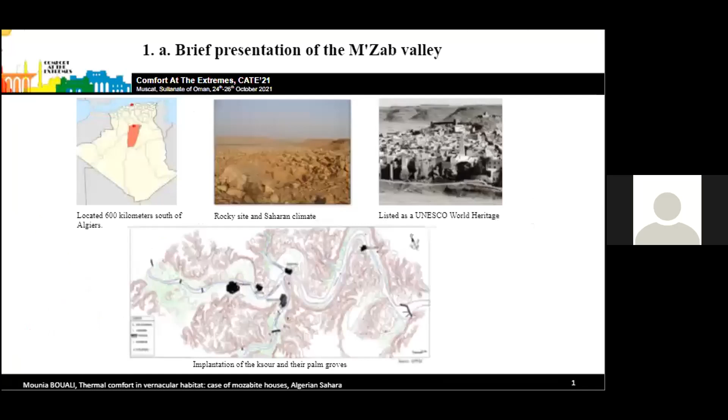As we can see, the Qsur and their palm groves are located along the Wadi Mzab, at two confluences. At the beginning of the 20th century, the oasis had nearly 2,000 inhabitants. Nowadays, it constitutes an oasis town of about 200,000 inhabitants, which gives it an urban character combined with oasis specificity.

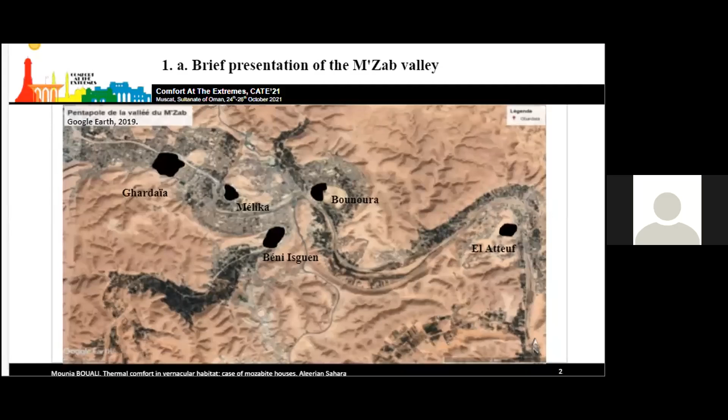Next slide, please. The oases have the same principle of implantation. The Qsar is always located on a rocky eminence to stay safe from floods. Then below, the palm grove grows on the bed of the Wadi, where it is easier to dig wells and develop agriculture. The vernacular house typologies that will be presented in this talk no longer exist in their integrity today.

It is for this reason that we mainly rely on restitution works, particularly abundant in the first half of the 20th century. In addition, we use information and descriptions collected through interviews and narratives of people who remember this former Mzab, which still remains very present in their speech.

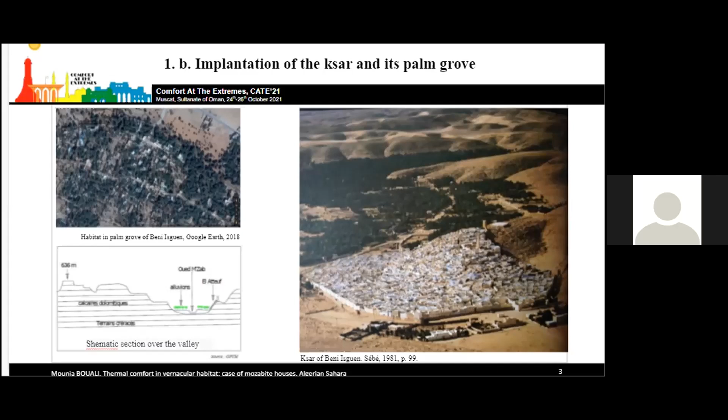Next slide, please. The Taddart are mainly built in stone and timshamt. Timshamt is a local mortar used for binding and as plaster. The roofs are made of a structure of palm trunks filled with earth, then covered with timshamt, this local plaster.

The house spaces are organized in 3 levels and connected by 2 staircases. The ground floor is composed of different spaces organized around a central room, called the patio, or وسط الدار, the center of the house. This central room on the ground floor has an extremely important role in temperature regulation.

In fact, with the front door, it creates a dynamic airflow which contributes to the ventilation of the ground floor. The central room is also the source of natural lighting on the ground floor through its zenithal opening, called shebek. Around this patio, the central spaces are organized: the women's lounge, reception area for men, the bedrooms, kitchen, and a dry toilet.

So it's the central space which all these spaces are organized around. The upper floor is semi-covered and partially built, and composed of the same spaces: bedroom, small storage room, dry toilet, shower area, and kitchen area too. These spaces are organized about the shebek, the zenithal opening of the ground floor, superposed on the spaces below.

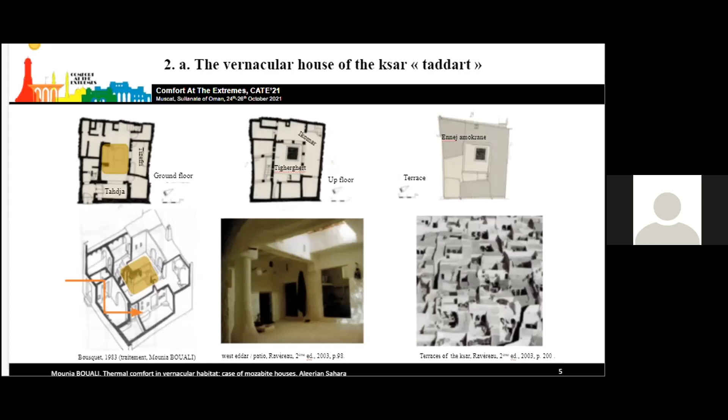The Mozabit dwelling, whether located in the Ksar or in the palm grove, is characterized by a way of living based on daily migration or movement between different floors, very interesting to observe. This temporal adaptation to climate through inhabiting is common in many hot countries, but particularly characteristic in the Mozabit oasis compared to other Algerian Saharan oases, which are composed of two entities. The classical definition is that an oasis consists of the ksar for houses and the palm grove for agriculture, but without dwellings.

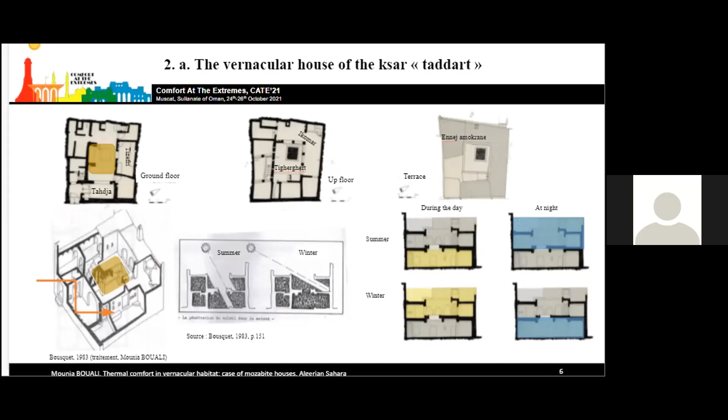The duplication of certain spaces from the ground floor to the first floor, like kitchen, toilet, and other rooms, does not mean there are two separate apartments occupied permanently and independently from one another. These are all spaces in the home used at specific times of the day, depending on the alternation between day and night and according to the seasons. Some are versatile, and their uses change according to the movement of the sun's rays.

During the winter, the sun is low above the horizon. During the day, the sun is low and the ground floor is dimly lit and cold. The stone walls allow the heat stored during the day to escape during the night. In contrast, the floor of the southeast-facing upstairs portico is in full sun and at the same time warms the ceilings of the rooms below. These orientations also make it possible to be sheltered from the prevailing northwesterly winter winds.

It is therefore on this floor that daytime activities take place. During this season, the loom is installed upstairs in the ikomar, the portico situated on the upper floor, as we can see in this picture. At night, the openings of the patio, the shebek, and the doors are covered with rugs to increase the thermal insulation of the room, and activities move to the ground floor, which has stored heat in the thickness of its walls during the day.

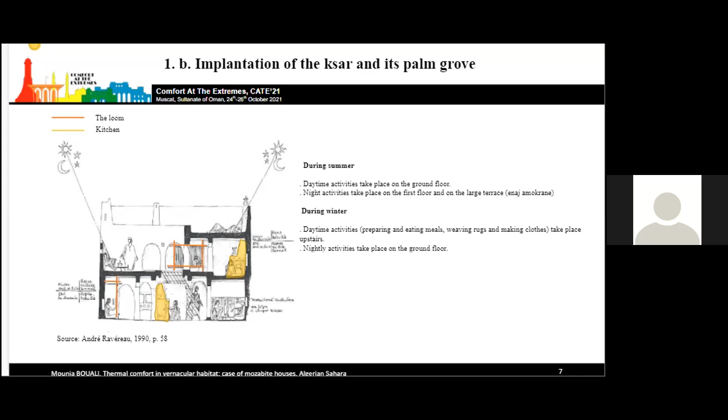In the tahdja, an intermediate space between the entrance door and the patio, during this season the loom is installed in the tahdja or in the tisafrit, the women's lounge, or in the patio, to take advantage of the light and freshness predominant in these spaces. The women's lounge, tisafrit, is below the ikomar portico, and since the sun is high in summer, the ikomar is in shade and protects the ceiling of the tisafrit in the middle of the day when the sun is at its peak.

The patio opening is covered with mats and moistened palm to keep the air fresh in homes with a cellar. The cellar is very popular for naps, since there is an important temperature difference of about 10 degrees. During the summer evening and at night, all activities take place on the floor between the portico and the terrace, the ground floor becoming uncomfortable due to the accumulation of heat absorbed through the day. The large terrace, which overlooks the covered part of the first floor, is mainly used for summer sleep.

Next, I will present the second type of Mozabit dwelling, which is the akham. Akham is the term used to designate this second habitat. It's established in the loosely built fabric of the oasis with a garden, and is occupied mainly in summer. This duplication of the habitat is also the result of seasonal migration to the palm grove, where people would stay for several months to carry out agricultural work, mainly related to the date palm. At the same time, it reflected the desire to settle in the palm grove to escape the heat of the Qasr, which lacks vegetation and has scarce water resources.

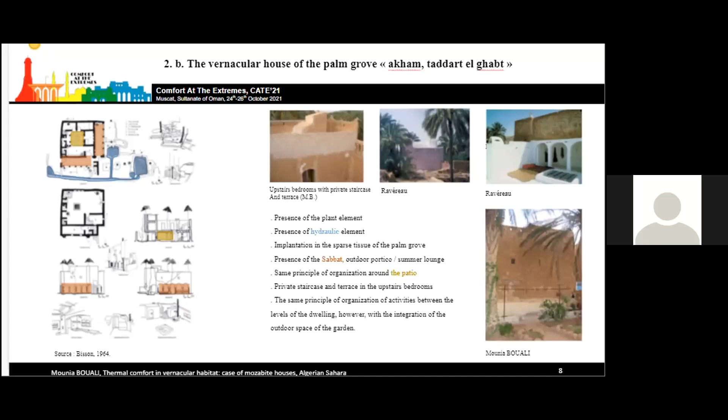In the Akham, the same construction materials are used, but more sun-dried earth bricks. As for the organization, we find in the Akham the same principle of vertical daily nomadism as in the Taddart.

However, the garden added an additional dimension to this move, because if in the Qasr terrace is only a space allowing to be outside, the garden of the palm grove is the preferred place during the vacation. It helped create a microclimate and humidify the air.

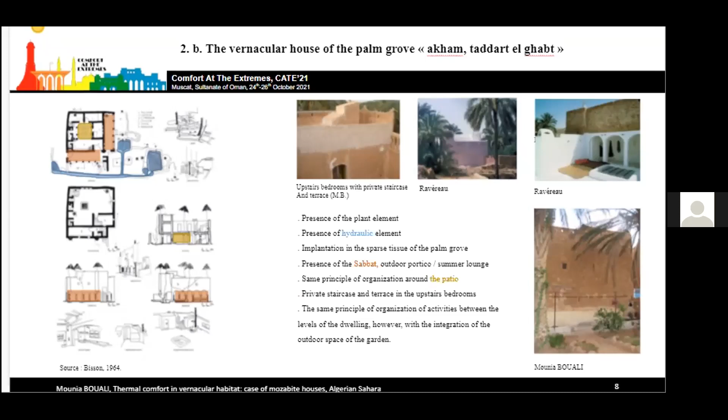So for my conclusion, I just need to say that it's very important not to imitate tradition, but to learn from tradition. The objective of my talk is to show how the question of thermal comfort can also be taken care of by inhabitant practice and simple elements.

Public and heritage policies must take into account local and specific modes of accommodation, for example the creation of parks and public gardens in line with urban development. Today the oasis town is expanding, but without thinking about extension of palm groves or parks. In the Saharan towns, outdoor space is part of residential culture that architects and urban planners must take into account. Thank you for your attention.

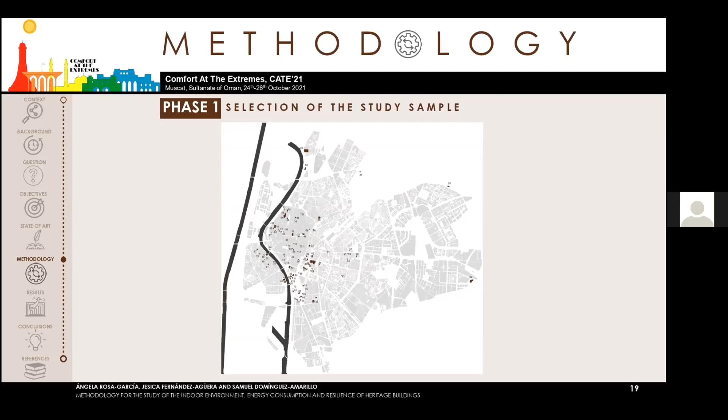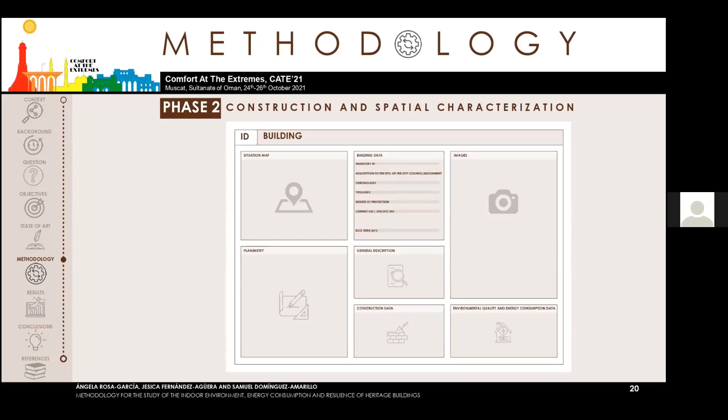In phase 2, the constructive and spatial characterization of each of the buildings in study sample A will be carried out, which will allow a first classification. A series of files will be generated like the one shown, which include information on each location, year of construction, use, construction data, surface, etc.

Phase 3, characterization of environmental conditions and energy consumption, is developed on study sample B. It will consist of in situ measurements of the interior environmental conditions and energy consumption. Indoor environmental monitoring will be continuous for a period of 15 days in winter, summer, and intermediate season. Measurements will be recorded every 10 minutes, creating a database with the current status. The external environmental conditions will be obtained by means of an external station that will be contrasted with the data of the National Meteorological Agency of Spain.

Phase 4 will consist of simulation of the evolution of climate change. It will also be carried out in study sample B. The evolution of thermal conditions inside buildings will be studied with the DesignBuilder program in the current state and other conditions of future climate change. Phase 5, generation of a database, will result from the compilation of data from the previous phases, generating an open database that can be consulted by the agents in charge of carrying out the rehabilitation or adaptation work of these buildings through the GIS tool.

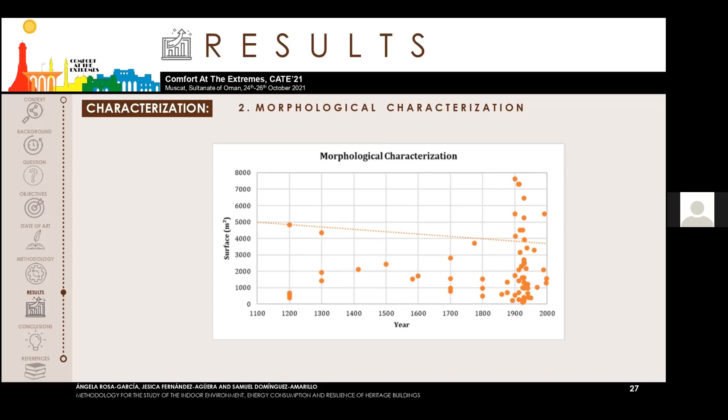As conclusions, this work includes a first approach to the application of the proposed methodology, which includes some of the fundamental characteristics of the buildings that make up this period, aiming at the complete cataloging, both spatial and constructive, of the building stock. With the characterization process carried out on the set of heritage buildings studied, several aspects can be concluded. First of all, in terms of the construction of buildings, the trend of slow and intermittent production has been verified until the 20th century. However, the 18th and 19th centuries stood out, experiencing a growing increase in both periods. Starting in the 20th century, more than half of the sample was built, specifically 62%, progressively accelerating the rate of production in this period.

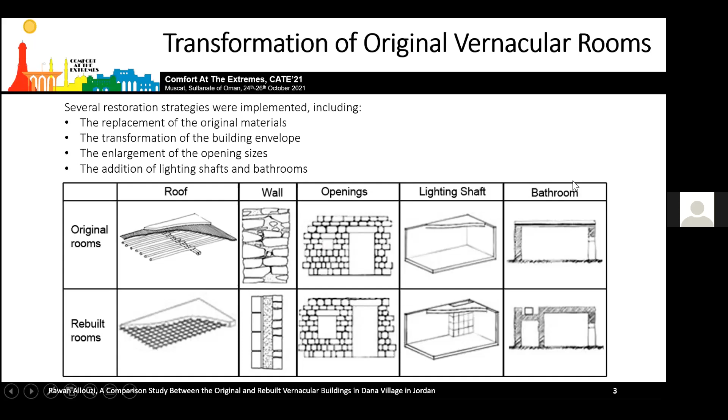Combined with the enlargement of opening sizes and the addition of lighting shafts and bathrooms, the implementation of these changes affects the indoor thermal conditions that depend mainly on several factors, including the construction materials, opening sizes, thermal mass, and orientation. Here we can see a few examples comparing the original form of the vernacular dwelling, which was composed of a single space. And after the rehabilitation project, we can observe that it's multi-spaces after the addition of bathrooms and lighting shafts.

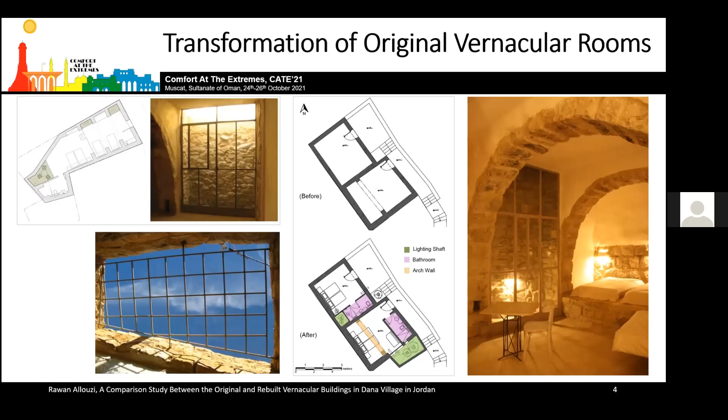Therefore, this paper seeks to assess the effectiveness of the restoration strategies by analyzing the thermal performance of both the original and rebuilt vernacular buildings. In other words, it aims to identify which type is more effective in providing thermal comfort in summer and winter, while highlighting the effect of the restoration on the thermal performance. For this purpose, Dana Hotel was considered as a representative case study because it contains both original and rebuilt rooms within its building. The thermal performance of the original and rebuilt rooms was assessed theoretically and practically.

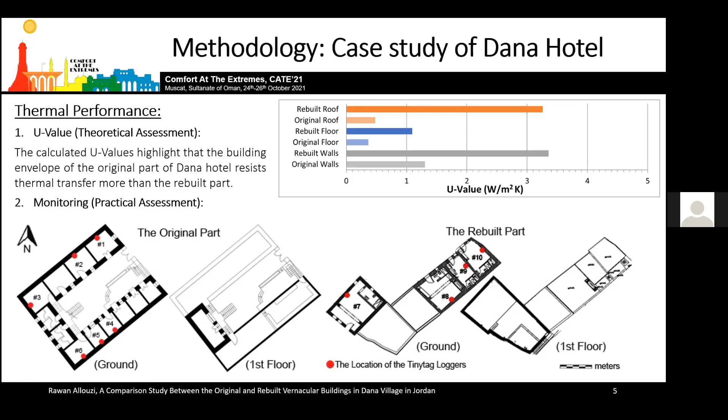On the other hand, to practically assess the thermal performance of the hotel, 10 hotel rooms were monitored for a period of 2 months, August 2019 and January 2020, including 6 original rooms and 4 rebuilt ones. The original part of the hotel is formed of 12 rooms surrounding the central courtyard from 3 sides. Meanwhile, the rebuilt part is formed of 6 en-suite hotel rooms composed of bedroom, bathroom, lighting shaft, and kitchenette. Tinytag loggers were used to record air temperature every 15 minutes, placed at 1.5 meters above the floor level.

The collected data was analyzed and compared between the original and rebuilt rooms, demonstrating the variation of the indoor temperatures throughout the day and providing thermal comfort as the criteria of assessment of this study. These criteria of assessment are first analyzed within the original and rebuilt part of Dana Hotel separately. The statistical method is used to analyze the monitored physical variables to assess the thermal performance, illustrating the fluctuation of the recorded data, which is the air temperature throughout the day, from day to day, and from room to room. And providing thermal comfort is investigated through the Adaptive Thermal Comfort Standard, BS EN 15251. Then a comparison study is conducted between the final results of both parts, using it as an evaluation method to assess the transformation of Dana's original vernacular building within the thermal context.

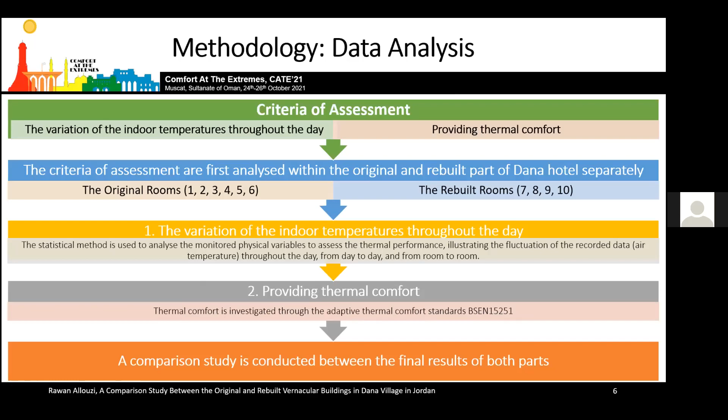Starting with the results, it was observed in the original rooms that the indoor temperature followed the outdoor temperature profile, but with a significant time lag, being always lower in summer. The maximum temperature is always less than the outdoor temperature around noon due to the thermal mass in all spaces except in the kitchen, which is space 6, due to the high internal heat gains from cooking.

This is because the thermal inertia of the thick stone walls and clay roof offers small fluctuations in the indoor temperature. The high thermal inertia of the original materials increases their capacity to store heat and then emit it outdoor when the temperature is lower. However, lower indoor temperatures are noticed in room 4 and 5 because their roof is not exposed to the outdoor conditions, having an additional floor above them, as we can see over here. Meanwhile, the roof of room 1 and 3 is exposed to the outdoor conditions and solar radiation, leading to absorb heat and transfer it to indoor spaces.

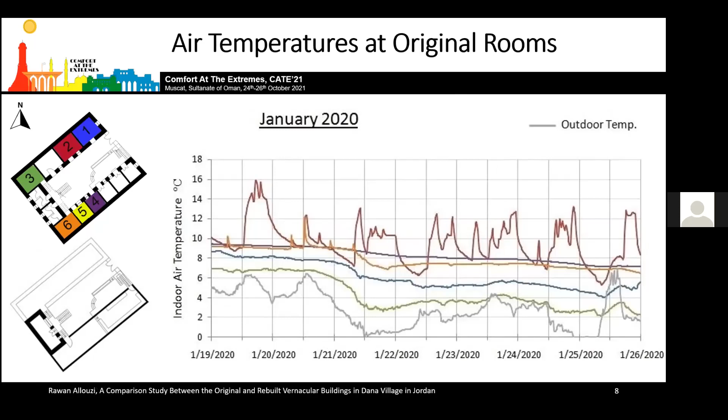A different pattern of variation is noticed in winter. The indoor temperature follows the profile of the outdoor temperature in room 3, being the coldest room among the other original rooms. This is because the sun does not enter this room due to the absence of windows. Moreover, it was not occupied during the winter monitoring period, showing less variation in temperature. Similarly, rooms 6 and 4 were also unoccupied but showed higher temperatures due to reduced heat losses from their roof, which is not exposed to the cold outdoor conditions.

On the other hand, the daily variation is more noticeable in room 2, with a diurnal swing ranging between 3 to 8 degrees Celsius. The indoor temperature is most of the time higher than the outdoor temperature, and the difference between them sometimes approaches 12 degrees Celsius when the outdoor temperature is very cold. The indoor temperature reaches its maximum in the afternoon and minimum at midnight. This is because when the outdoor temperature reaches its maximum near noon, the concrete roof of room 2 transfers the absorbed heat to the indoor spaces after a short time due to its lower thermal capacity.

As expected, the variation of indoor temperature is influenced by the building envelope and opening sizes and orientation, as well as construction materials. The few and small size of windows protect the indoor spaces from direct solar beams during summer days and offer good ventilation and cooling during summer nights. Meanwhile, these windows allow the sun rays to indoor spaces during winter days due to their lower elevation angle.

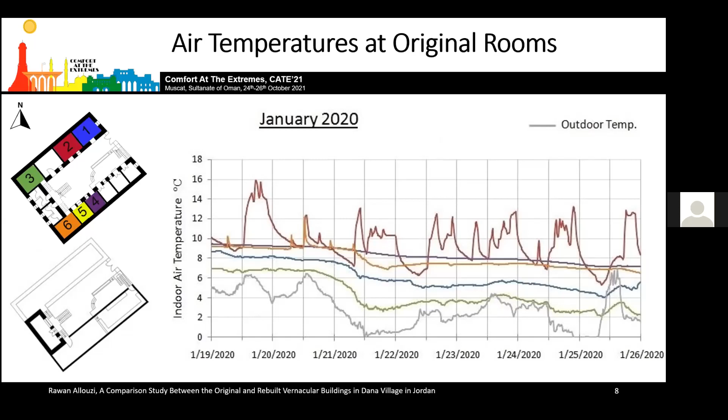Moving to the results of monitoring the rebuilt rooms, the trend of the indoor and outdoor temperature is different than the original rooms, as the changes of the indoor temperature do not follow the changes of the outdoor temperature in summer. The indoor temperature is higher than the outdoor temperature at night and lower during the day. The fluctuation of the indoor temperature is small and the temperature is consistent. Indeed, the daily variation is hardly noticeable in all spaces despite different occupancy hours. They reach the maximum temperature in the afternoon and the minimum in the morning.

The enlargement of windows and the addition of lighting shafts helped in providing cooler conditions. In terms of enlarging the external windows, these windows enhance air movement due to their bigger size. This strategy is efficient as they are northern windows, which do not bring in solar gains. Moreover, the addition of lighting shafts is providing internal windows that enhance the air movement and ventilation for cooling.

It's observed that room 8 has slightly colder conditions compared with room 9 and room 10, although they have the same building envelope, opening size, and orientation. This is because room 8 is bigger in size, increasing the heat transfer area in the room. Moreover, room 7 and room 8 have approximately the same area, but room 7 is slightly warmer due to having southwestern windows that bring in solar gains, warming up the indoor spaces in the afternoon.

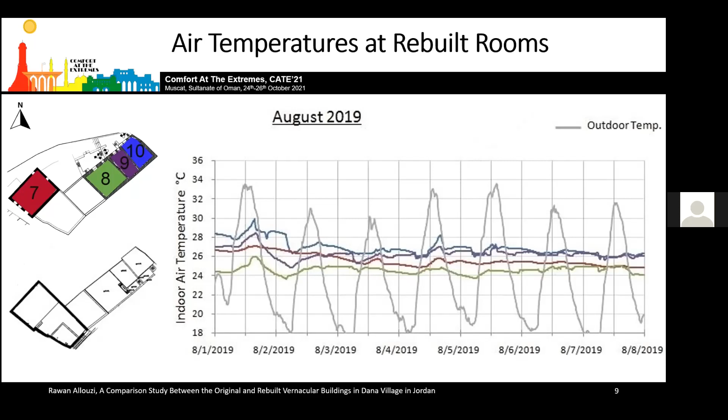A different pattern is noticed in winter with a wider fluctuation, less affected by changes in the outdoor temperature. The indoor temperature is higher than the outdoor temperature most of the time. The daily variation is noticeable sometimes in some spaces more than others.

For instance, the diurnal swing varies from 0 to 8 degrees Celsius, showing small values at room 7 due to non-occupancy status, as we can see here. Meanwhile, the diurnal swing values at rooms 8, 9, and 10 are bigger and more variable according to their occupancy time.

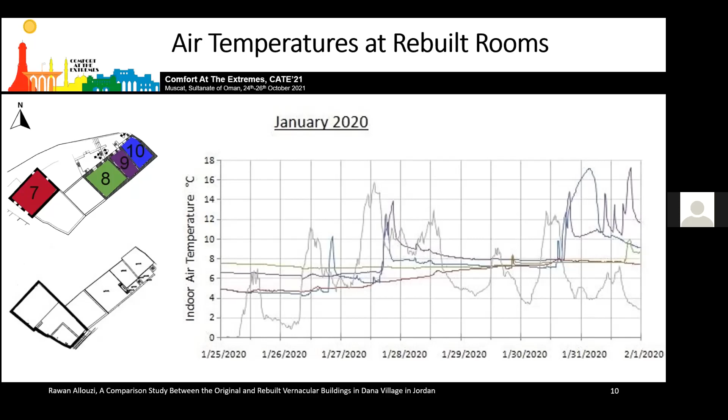In winter, the indoor temperatures are either similar in both types of rooms or slightly warmer in the rebuilt rooms. The original spaces show different performances as some rooms, such as 4 and 6, show less variation in the indoor temperature compared with the other original spaces, as they were unoccupied at that time. Meanwhile, the other original and rebuilt spaces provide similar variation in the indoor temperature.

You have 1 minute left.

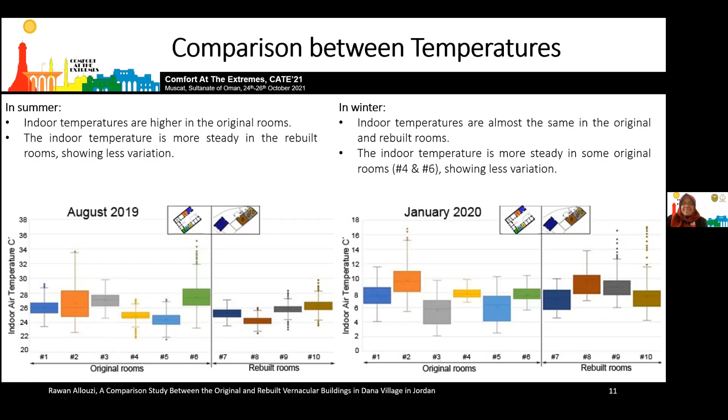Bigger and more windows were used in the rebuilt rooms, enhancing the air movement while preventing solar gains. The orientation of these openings reduced the impact of their size because the direct solar gain is the main contribution affecting the indoor temperature. Therefore, the inward and northern orientation of the windows and lighting shafts of the rebuilt rooms reduced the impact of being more exposed in summer. Moreover, passive cooling strategies such as plants and trees in front of the rebuilt rooms enhance night cool breezes.

The adopted changes in the rebuilt rooms work together to adapt to the weather as a whole system, including the replacement of the building envelope, the addition of lighting shafts, and the enlargement of windows. Replacing the building envelope without increasing the opening sizes would disable the whole system, as observed in room 2. The replacement of the original roof while keeping the original opening sizes failed to adapt to the outdoor conditions, providing more variation in indoor temperature.

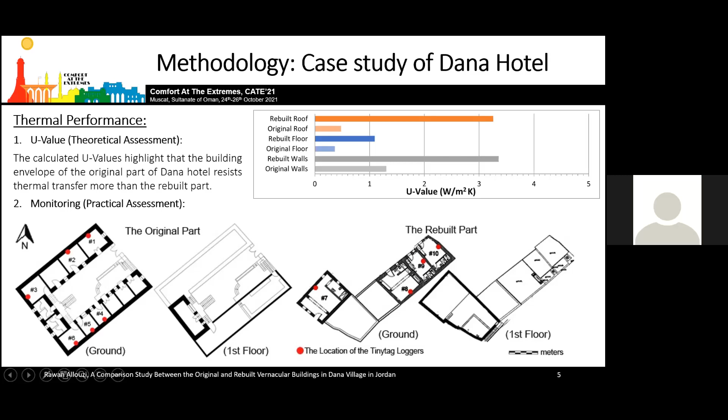In summary, let me show one sentence to summarize. Yes, for each slide, just one sentence.

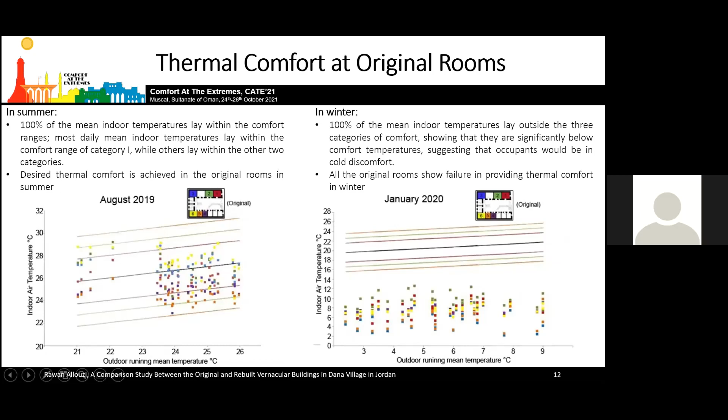We can see here, discussing the thermal comfort in both types of buildings, that desired thermal comfort is achieved in the original rooms in summer, as they lie within the comfort ranges, while all the original rooms show failure in providing thermal comfort in winter. For the rebuilt rooms...

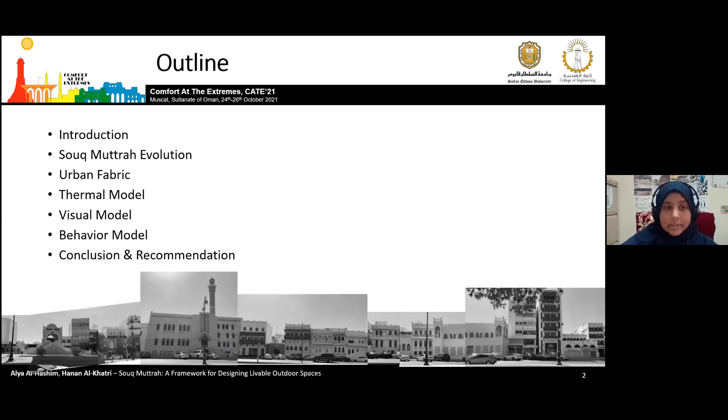To start with, streets have been used as a space for engagement in commercial and social recreational activities throughout the years. Livability of street and open spaces is a major consideration for designing sustainable cities. Livable outdoor spaces encourage dwellers to spend more time outdoors, which is important because of its positive impact on health and well-being. A healthy community encourages its dwellers to spend more time outdoors.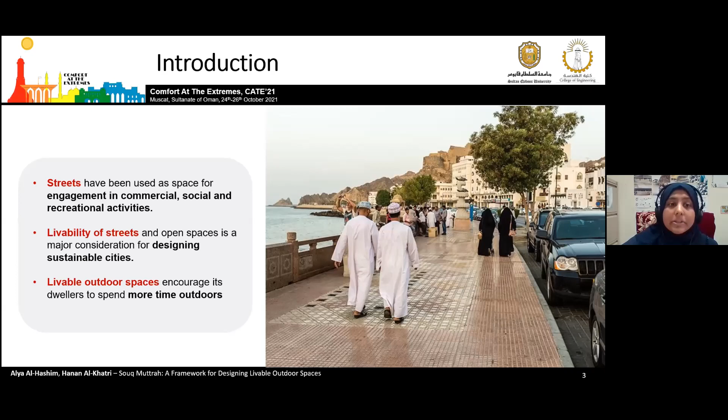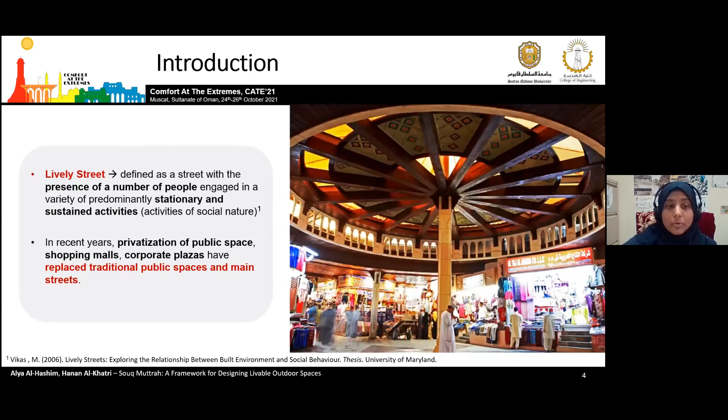A lively street is defined as a street with the presence of numerous people engaged in a variety of predominantly stationary and sustained activities. These activities are most of the times of social nature. In recent years, privatization of public spaces - shopping malls, corporate plazas - have replaced traditional public spaces and the main street. Having the malls has attracted most of the visitors, and this has reduced the traffic that we saw over the years in public streets.

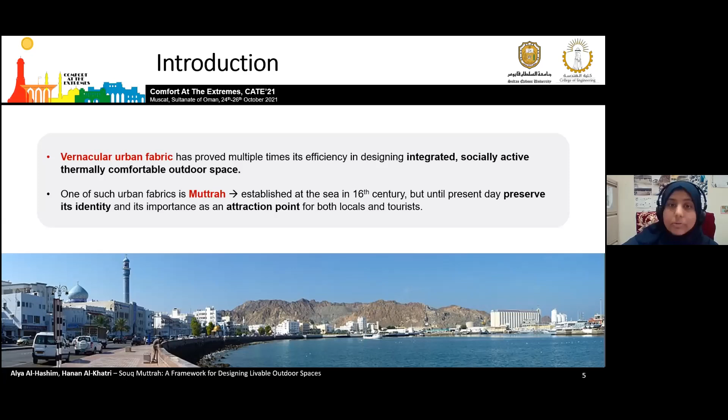Vernacular urban fabric has proven multiple times its efficiency in designing integrated, socially active, thermally comfortable outdoor space. One such urban fabric is Muttrah. It was established at the sea in the 16th century, but until present day preserves its identity and importance as an attraction point for both locals and tourists. Even now, with all the malls and modern spaces, people still choose to go to Muttrah Street, and tourists also consider it one of the most important destinations when they visit Muscat.

The aim and focus of this research is to determine the relationship between the micro-scale physical characteristics and uses, and people's pattern of social activity in commercial streets - linking human behavior with the physical properties of the street. The underlying objective of this study is to investigate the correlation pattern between spatial behavior and physical characteristics of the urban space.

The methodology followed in the research is that the open space was analyzed in terms of physical geometry, connectivity, thermal and visual performance. Different models were created for showing the different layers or performance of different aspects. These properties were then overlaid over the spatial use and behavior. Multiple Rhino Grasshopper scripts were used to extract urban geometry, connectivity properties, and thermal and visual performance of the urban fabric.

This is just a demonstration of how different types and different layers of an urban property were considered and linked to the human behavior.

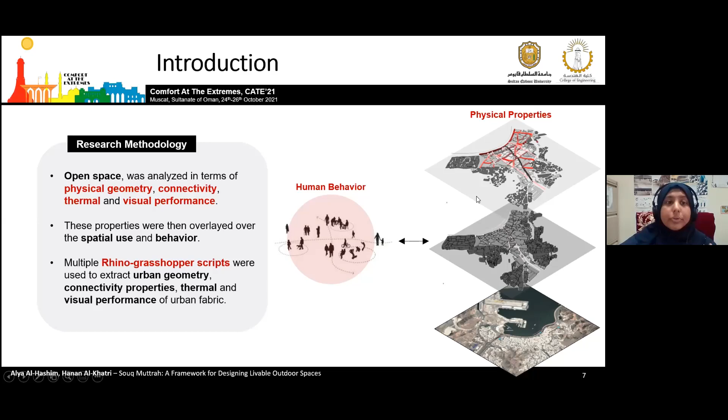Before discovery of oil in the 1970s, Muttrah was the center of Omani commerce. It is still considered the largest seaport in the region, consisting of a traditional marketplace called Souq Muttrah and housing communities. Strategically located adjacent to the Harbor Muscat, it witnessed thriving trade in the age of sail. Souq Muttrah gave way to a cosmopolitan society to function and trade, who maintained their culture, habits, and language through engagement with the local traders.

This was the reason why Muttrah Souq thrived in the beginning and is still thriving. The souk still maintains a unique sense of place and a position worth studying. This sense of space that Souq Muttrah is providing is one of the key reasons why it still maintains its identity and its livelihood.

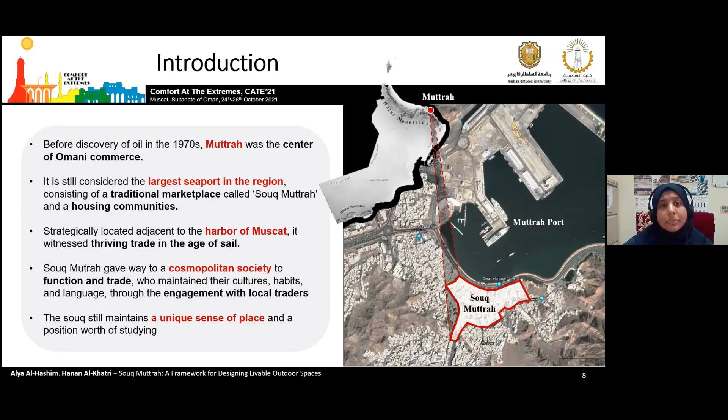Souq Muttrah's current general state is similar to the way it appeared during the 1970s. So if we compare from 1970 up until now, in terms of the fabric itself, it has maintained its integrity or the same shape.

The most apparent difference in the souk over time is the changes in land use. As the years passed, the land use kept changing, the type of shops kept changing, based on the variety of products received from the harbor and what consumers started preferring more and more. So the land use and the products sold kept changing and adapting over the years.

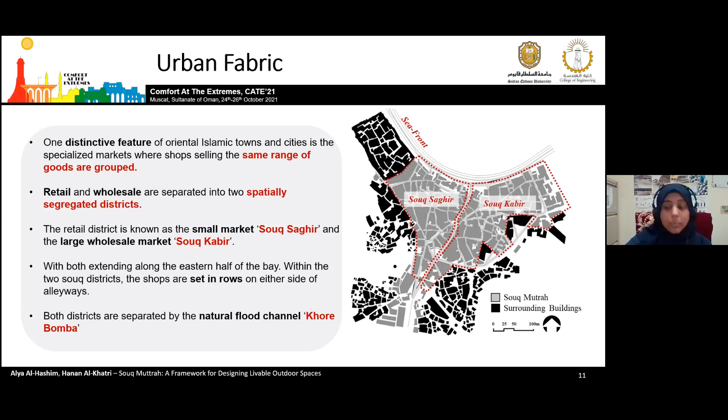The total pedestrian network is around 6,270 meters in the entire Souq Muttrah. Since the souk has been one of the main touristic destinations of Muscat, this explains the large number of souvenir and antique shops focused along the main spine.

However, as the pathways continue further away, the products of the retail units tend towards more regular day-to-day shopping for the residents of the neighborhood areas.

In this map, you can see that there are different pedestrian walkways. They change in terms of width, which we will talk about later, and also in height. You will also find that multiple pedestrians connect with each other in areas known as nodes.

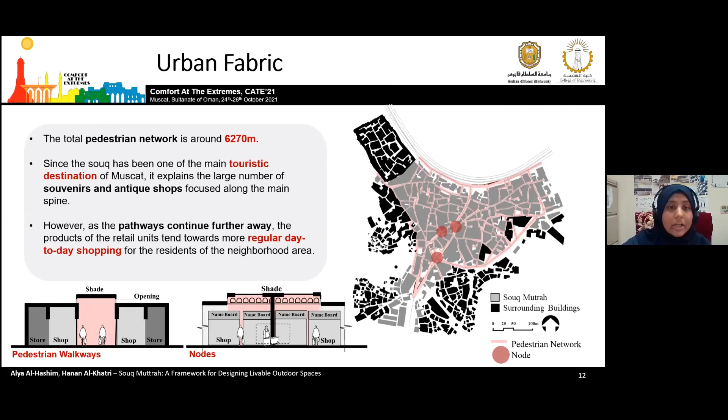These nodes are where multiple pedestrians get together and create a bigger node. Now, coming to the thermal model, urban canyon is a simplified rectangular profile of infinite length. It has been adopted as the basic structural unit for describing a typical urban open space, based on the width, height, orientation angle, and the shade of the rectangular profile of the urban canyon.

The pedestrian network in Souq Muttrah can be categorized into 9 types, 8 of which are the pedestrian pathways we talked about, and the 9th is the node.

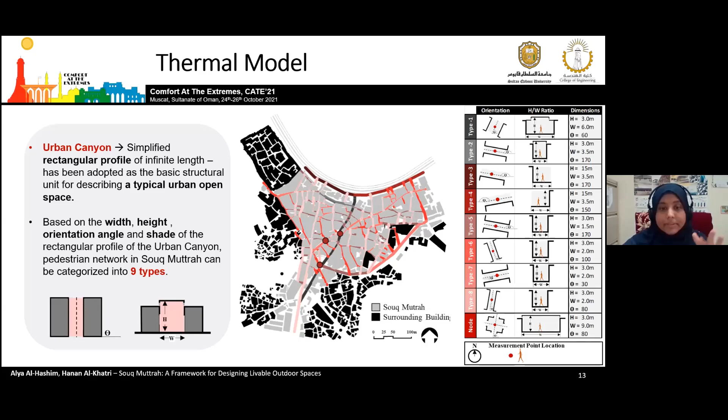On the right-hand side, you can see all the typologies, their orientation, and height-over-width ratio of the urban canyon, the dimensions, and you can see on the map how these types are projected onto the pedestrian connection map of Souq Muttrah, and how the different types manifest within the urban network.

Continuing on the thermal model, an urban microclimate model is fundamental to the evaluation of outdoor thermal comfort. The analysis geometry used for the thermal model was the urban canyon discussed earlier, and the unit of measurement chosen was the mean radiant temperature, which is a key variable for evaluating outdoor thermal sensation, used instead of just the outdoor temperature. The tool used to conduct the thermal model was Rhino Grasshopper with the Ladybug plugin.

On the right-hand side, you can still see the different typologies we segregated the urban canyon into. Next to it, you can see the mean radiant temperature fluctuation throughout the year, over 24 hours of the day. The dark grayed areas are the times when the souk is not functioning. Just to bring to your attention, the souk's functioning times are from 10 a.m. up until 1 p.m., then it closes and opens again at 4 p.m., continuing up until 10 p.m.

Compared to the outdoor mean radiant temperature, the pedestrian network in Souq Muttrah provides a thermally comfortable environment, especially in two spaces: the node and the type 2 urban canyon, where we see a significant decrease in mean radiant temperature. Compared to the outdoor measurement point, the difference, or delta, in mean radiant temperature is around 35 degrees Celsius in summertime. The difference is not as much in wintertime, but the thermally comfortable environment the pedestrian network provides can be seen during summer and the equinox months.

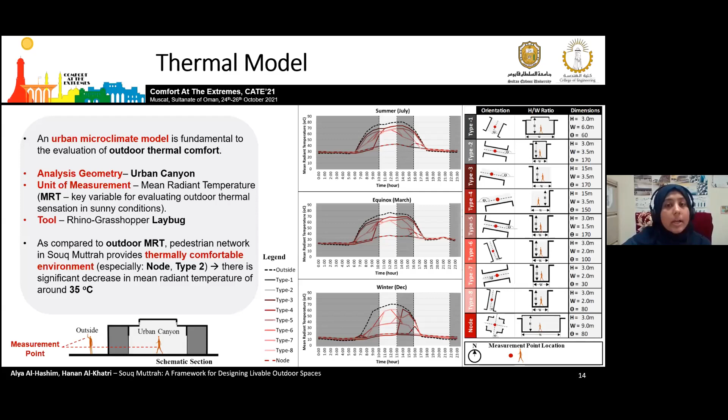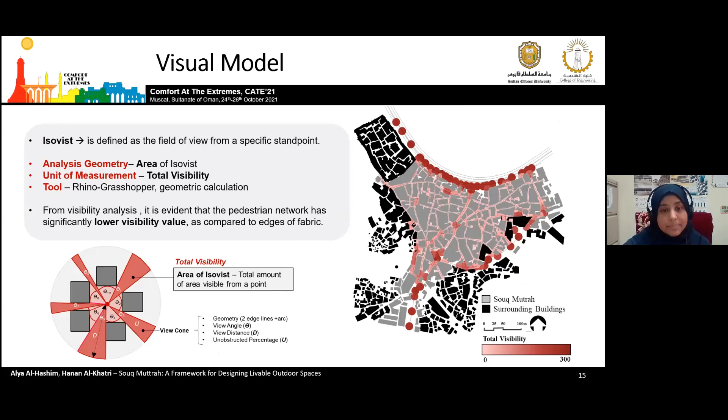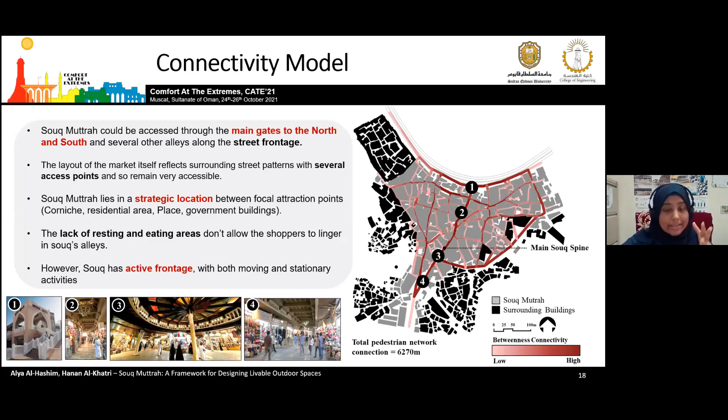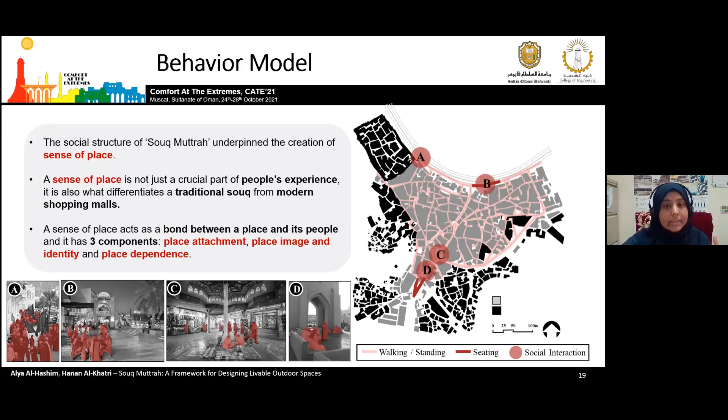Souq Muttrah is accessed through the main gates; however, there are multiple access points from the site. The main spine lacks any seating or eating area, to keep shoppers from lingering around. So where shoppers or visitors actually spend most of their time is at either of the two ends of the souk—they don't spend much time in the pedestrian spine itself, they simply pass by and shop. Whereas the parts which provide seating areas are the front and the sides of the souk, at its edges.

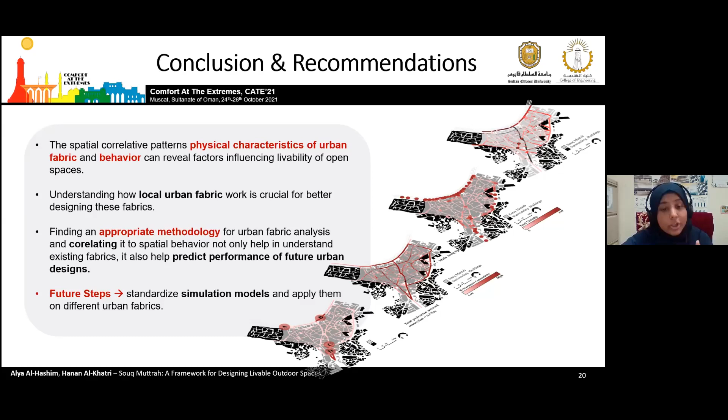So finally, just to wrap everything up, the spatial correlation between patterns, physical characteristics, urban fabric, and behavior can reveal factors influencing the livability of open areas. Just to move on to the future step: our future work is to standardize simulation models and apply them to different urban fabrics, to correlate factors with behavior and predict the performance of future urban designs, not only analyze the ones that already exist.